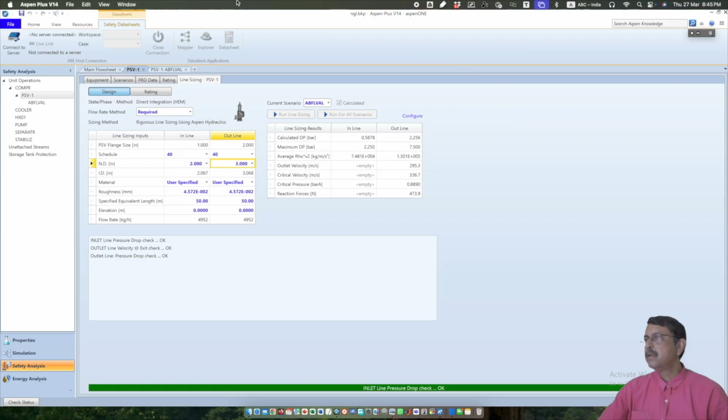Now let us go to the other one, that is the rupture disk. Okay, let us first understand what a rupture disk is. A rupture disk or a bursting disk is a non-reclosing pressure relief device. Reclosing means it again closes, so it opens and closes. Pressure safety valve works in that fashion. So whenever it is required, it opens, and whenever its job is done, it closes.

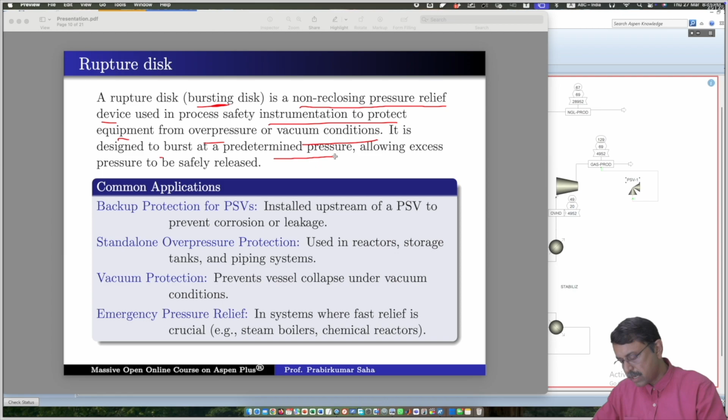But in this case, it ruptures, it bursts. Okay, so it is sort of a one-time use device. So it is a non-reclosing pressure relief device, which is used in process safety instrumentation to protect equipment from overpressure or vacuum condition. It is designed to burst at a predetermined pressure, allowing excess pressure to be safely released.

So the job of the pressure safety valve and the rupture disk, they are the same. And in addition to the overpressure, the rupture disk also caters to the vacuum condition, which the pressure safety valve doesn't do, but the rupture disk does. There are certain common applications. Obviously, the household application I have already discussed, how it is done in a pressure cooker, but industrially, this is a common backup protection for a PSV. Even in the case of the pressure cooker, this rupture disk is a backup protection or the extra layer of protection.

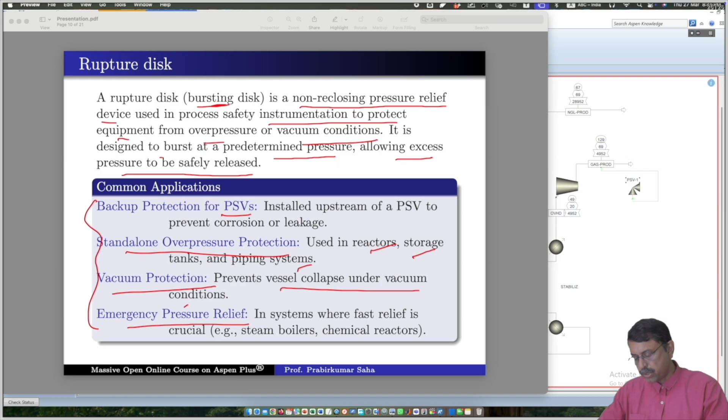Okay. It can be a standalone overpressure protection also. I mean, there might be a case where there is no pressure safety valve and there is only a rupture disk. For instance, a reactor or storage tank or piping system, or more commonly in a vacuum tank. There we probably cannot use the pressure safety valve, so we have to use a rupture disk. That's what is written over here, vacuum protection. It prevents vessel collapse under vacuum condition, and emergency pressure relief, where fast relief is crucial, like steam boilers, chemical reactors. These are the characteristics of a rupture disk.

It is non-reclosing. Just now we have discussed what it is. It should have fast response. Obviously, the pressure safety valve also should be of fast nature, but the rupture disk is faster. And its reliability should be very high because it is the backup for the pressure safety valve. So even if there is a pressure safety valve and in an unfortunate event it fails, then the rupture disk should remain reliable enough to burst and maintain the safety of the whole process. So the rupture disk should not fail at all. So there should be high reliability on that.

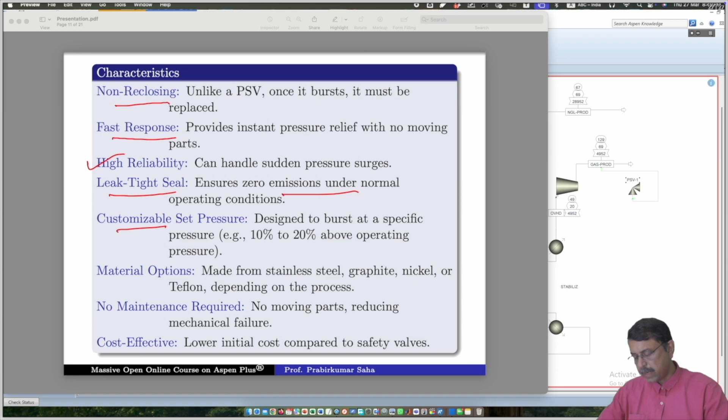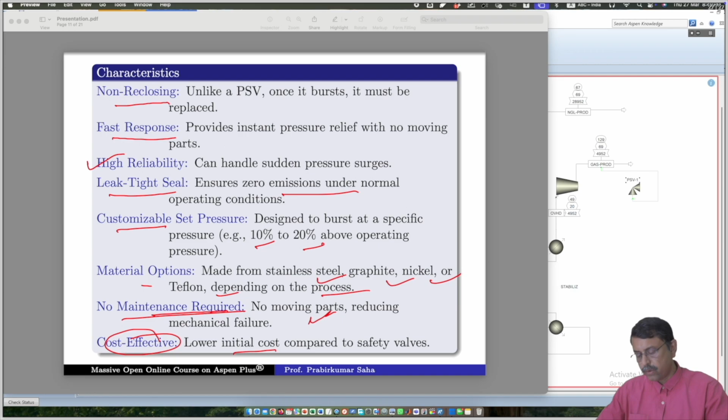And it has a leak-tight seal, so it ensures zero emission under normal operating condition. The set pressure should be customizable. It can be 10%, 20% of operating condition or whatever it may be. There are various options for material selection like stainless steel, graphite, nickel, Teflon, depending upon the process. And no maintenance is required because it doesn't have any moving part. So the mechanical failure chance is reduced quite a lot. Okay. So it is a fit and forget kind of thing. Obviously, it is cost effective because the initial cost is low.

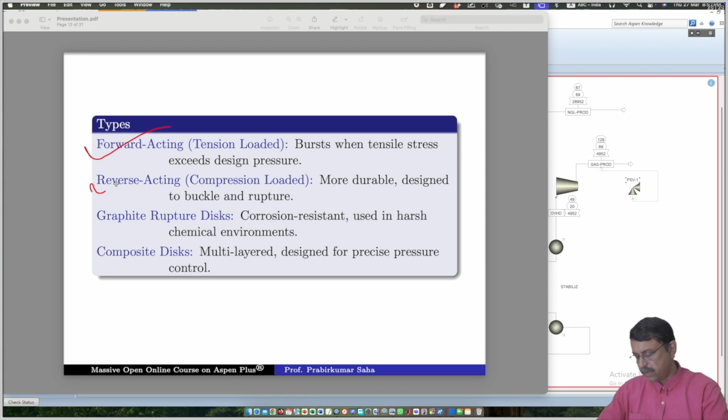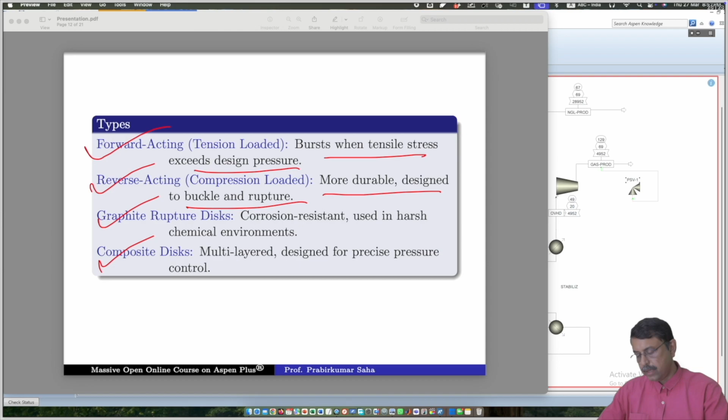Then there are various types of rupture disk. They may be forward acting, reverse acting, graphite rupture disk, composite rupture disk. Okay, each and every type has their own characteristics and they are usable for particular situations. They are listed over here.

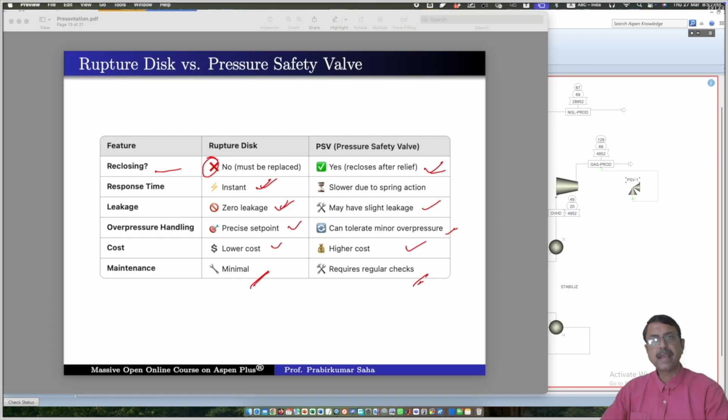Now, let us take a rupture disk and connect it to the other pressurized flow, that is NGL prod. This is a liquid flow. Okay, so let us connect over here just like before. Yeah, so this rupture disk is getting connected with NGL. So let us open this. Just like before, we have got the set of operating temperature and operating pressure, design temperature, design pressure.

Now we have to set the design temperature and pressure. So let us take it as a reference value only. Okay, in this example, let us take the reference value. Although it is not justifiable, we have to take slightly higher than the operating case, but let us take this one and see how it goes. Then we have to choose a scenario. First, we have to create a scenario. And this scenario, let us open it.

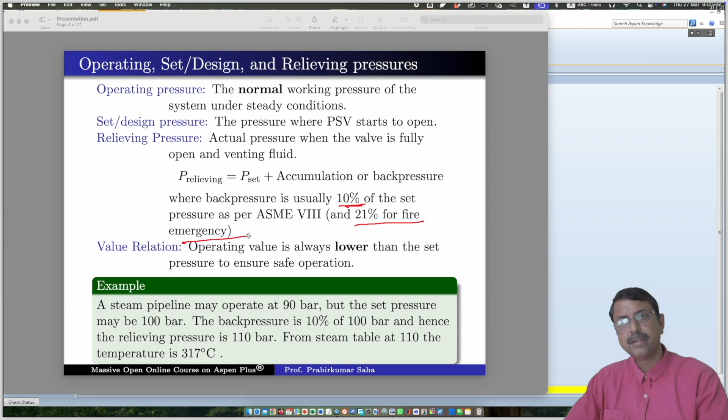We are getting 82.20. Why? Because remember, we learned over here, the back pressure is usually 10%, but it is 21% for a fire emergency. We have taken the fire emergency, right? So it is 67.93 multiplied by 1.21, 21%. That is 82.1953. Okay, that's exactly what we are getting over here. So remember, it is a fire situation.

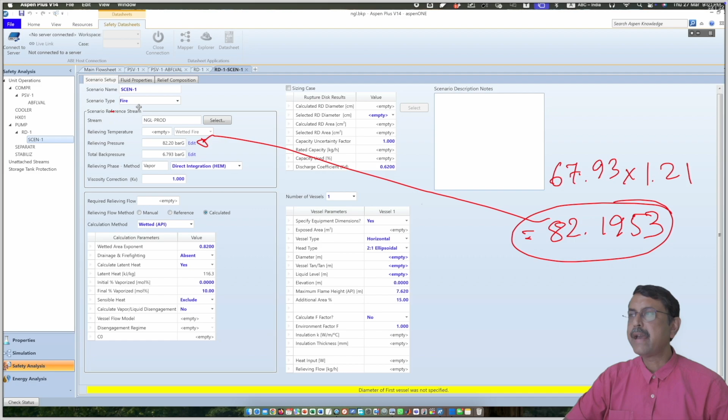Anyway, let us take the relieving flow not as calculated. We take the reference one, and the reference one is 28,952 kg per hour. So it is 2.8952 into 10 to the 4 kg per hour. That is the required relieving flow. And the relieving temperature we have to provide. So let us take the reference temperature only.

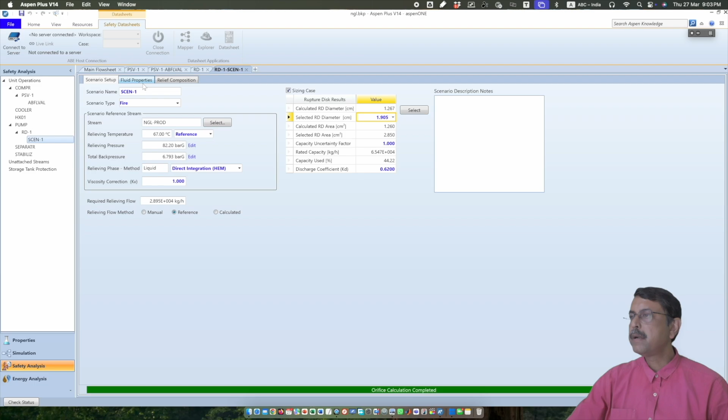And the orifice calculation is complete, but we have to do the sizing. So let us take 1.90. Go to fluid properties. Relief composition. In the relief composition, you will find almost nothing for methane, ethane, propane. But from butane onwards, you will find some components. Especially butane, PC200, PC300. These three are quite high.

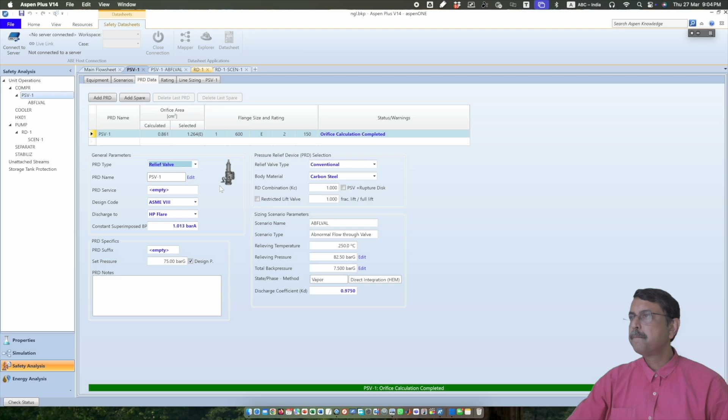Now go to PRD data. So in the PRD data, it is a rupture disk. It is not a relief valve, right? It is a rupture disk only. So it shows like this. PSV, you remember? This is the relief valve, PSV. Whereas the RD, rupture disk, looks like this. And for the discharge, we can use the high pressure flare.

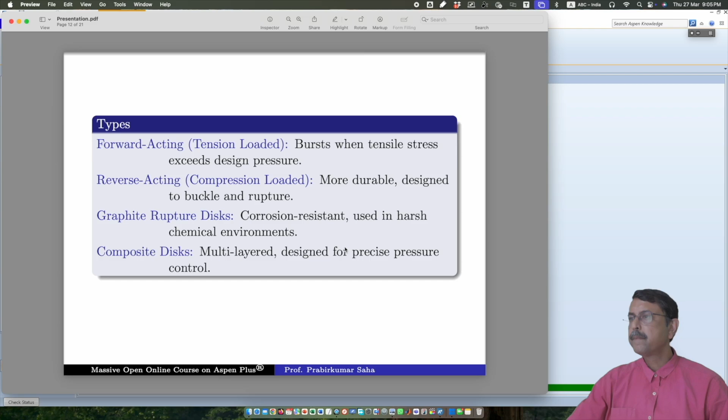And these are the rupture disk types: forward acting, reverse acting, graphite, composite. We just saw that, right? So based on the type of rupture disk required for your case, you can choose from here. The disk material you can choose from aluminium, nickel, stainless steel. Then go to rating. Here you can see the overpressure. Allowable overpressure is 21%. So 67.93 multiplied by 1.21 will give you 82.2.

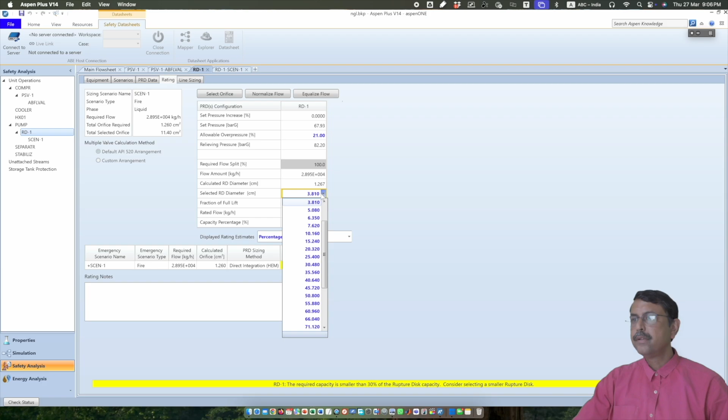Now with the selected RD diameter 1.90, you are using 44.22% of the orifice area. So that is the reason you are getting the green stripe. If you use a smaller one, then it is above 95%, so it is not correct. And if you take a higher one, then it is taking less than 30%, so it is not correct. So we chose this one. Let us keep it there.

Finally, line sizing. The rated flow is very high. So we will do it for the required flow, which is this one. We will choose schedule 40, this also 40. ND we will take, say, 2, and this one also 2. Here we have to click run sizing, but according to the API section, the inlet pipe to the rupture disk using discharge coefficient must be less than 8 times the pipe diameter in length. Now for the inlet pipeline we have taken 50 meters, but 8 pipe diameters is 0.41 meter. So this needs to be less than 0.41 meter.

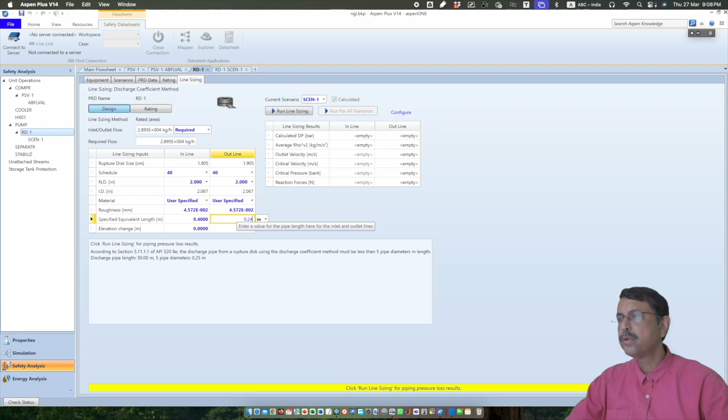Similarly, the outlet pipe must be less than 5 pipe diameters in length. The discharge pipe length we have given as 50, but it should be less than 0.25. So let us take this one 0.4 and this one 0.24 and try. Okay, so those two warnings are gone. Now click line sizing. Let us check the line sizing. Yeah, the pressure drop check is okay. So we are done with the rupture disc.

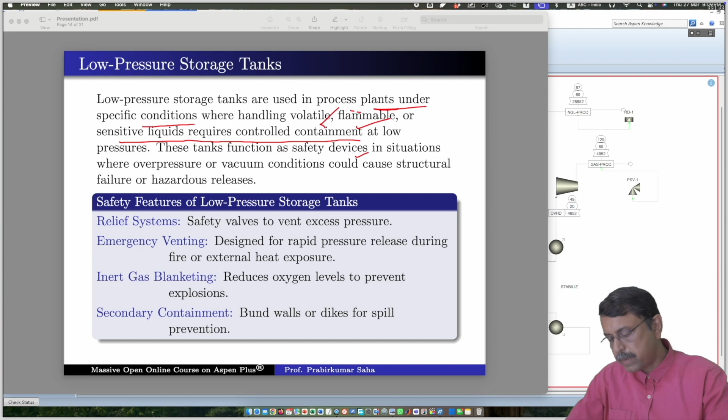Now the last one is storage tank protection. Low pressure storage tanks are used in the process plant under specific conditions where handling volatile, inflammable or sensitive liquids requires controlled containment at low pressure. So these tanks function as safety devices in situations where overpressure or vacuum conditions could cause structural failure or hazardous release.

Unlike the pressure safety valve and rupture disc, we are not letting it go out in the atmosphere or in the flare. Rather, we are trying to store the liquid or fluid in a tank, which is essentially a low pressure tank. It will also have its own pressure release valve and rupture disc as well. So these are the safety features of low pressure tanks.

It needs to have a safety valve to vent the excess pressure, and emergency venting and pressure release during fire and external heat exposure. So whatever we have discussed for pressure safety valve and rupture disc, the same thing will come over here. And it also has to have inert gas blanketing and secondary containment. So that is also needed.

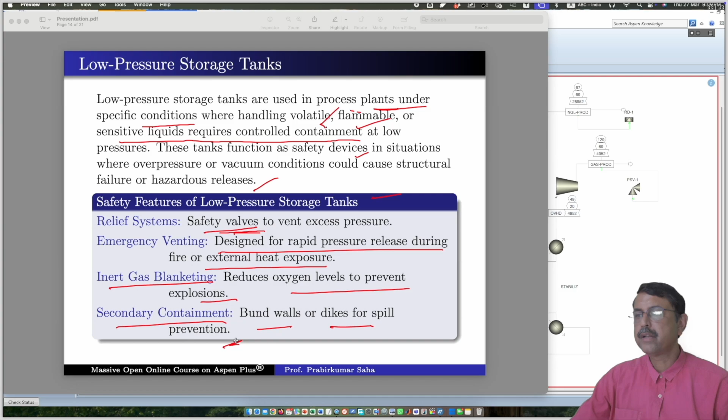Inert gas blanketing will reduce the oxygen level to prevent explosion, and secondary containment will have some bund walls or dikes for spill prevention. So these are kind of safety features for low pressure storage tanks. So these are certain conditions that require low pressure storage tanks.

Storing volatile liquids at low pressure, used for liquids with high vapor pressure such as LPG, ammonia, hydrocarbon, etc. Then protection against overpressure or vacuum collapse, equipped with pressure or vacuum relief valves to maintain tank integrity and prevent implosion during rapid emptying and cooling. Handling large volumes of low pressure gases or liquids, suitable for atmospheric and slightly pressurized storage of substances like crude oil, ethanol or LNG.

Minimizing evaporative losses, like it is used in refineries and chemical plants to store petroleum products while reducing emissions. And for preventing boiling liquid expanding vapor explosion, designed to contain vapor safely and avoid sudden rupture in case of fire exposure. So these are certain conditions that require low pressure storage tanks.

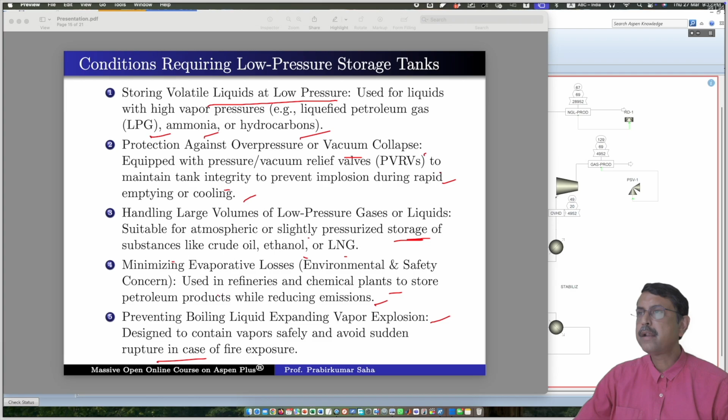Although it is said over here, in Aspen Plus we do not give such details. We just have to select the stream, and in the stream all those detailed information will be there, because the stream says that it contains methane or ethane. So what will be the density and specific gravity of that mixture of so much ethane or methane or all other pseudo components in that proportion? What is the density of that mixture? What is the specific gravity? The vapor pressure, boiling point of that mixture. All those things will be taken from the Aspen Plus property database.

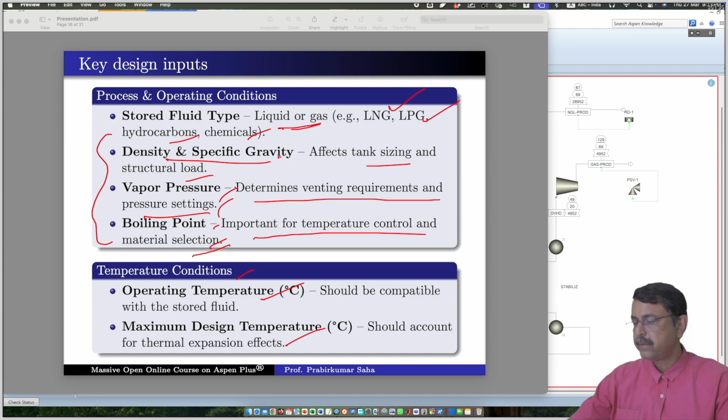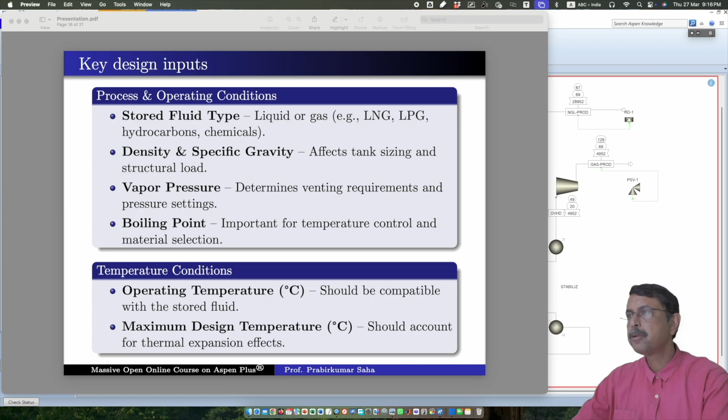Then the temperature condition, the operating temperature and maximum design temperature need to be specified. Again, if we select the stream, the operating temperature will be taken from there. Then the pressure and vacuum design parameters: we have to specify the design pressure, which should typically be 10 to 25% above the maximum operating pressure. The operating pressure is the expected pressure range under normal conditions. Vacuum design pressure prevents tank collapse due to rapid emptying and/or condensation.

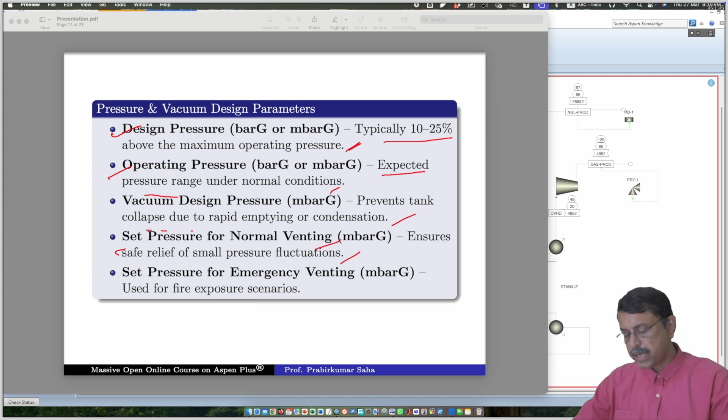The set pressure for normal venting ensures safe relief of small pressure fluctuations, and the set pressure for emergency venting is used for the fire exposure scenario. Then we have to mention the tank geometry and structural inputs, that is tank type, whether horizontal, vertical or spherical. Tank diameter and height determine the storage volume. Then material of construction like carbon steel, stainless steel or special alloy. The corrosion allowance, required if dealing with corrosive fluid, and bottom tank height above grade, typically 0.5 to 1.5 meter for drainage and maintenance purposes.

Then we have to provide the information on venting and relief system design. The relief valve sizing, as per API 2000, to ensure adequate venting capacity. So normal venting capacity, emergency venting capacity, breather valve design, inert gas blanketing.

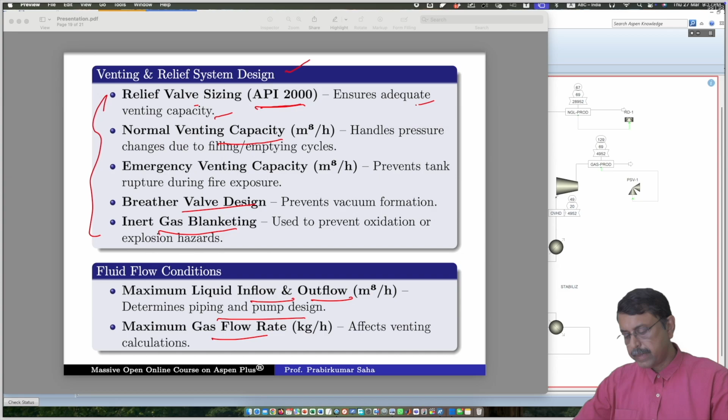So all those things we have to specify. The fluid flow condition, the maximum liquid inflow and outflow, that determines the piping and pump design. Maximum gas flow rate affects the venting calculation. The last but not the least, we have to check the safety and regulatory compliance. These are the applicable design standards like API 650, API 620, API 2000, ASME Section 8.

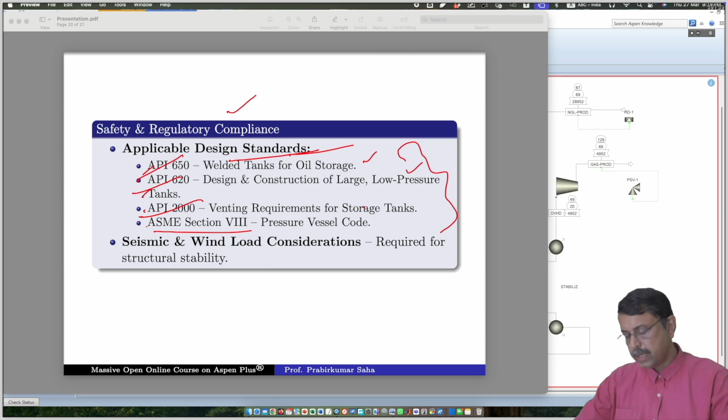So whatever you want to choose, you have to. But for various kinds of application, the standards will differ, so you have to choose appropriately. And the seismic and wind load considerations are required for structural stability. So these are the things that you have to check.

Now let us call a storage tank protection. Okay. So here add one. Now you have to enter the design pressure. Okay. So this is the tank one. Now you have to select the stream first. Now this stream, you can leave it empty or you can select an Aspen Plus stream. Now if you leave it empty, then there is much other information that you have to feed in.

But if you just select a stream, I mean if you dedicate this storage tank protection to a certain stream, then you need not provide that information. I will show you how. For the time being, let us keep the stream empty. Okay. Now for the time being, we give a design pressure. Let us say 0.3 design pressure we provide.

Then we have to mention operating pressure. Say vacuum design pressure. Vacuum, so it should be negative because it is in gauge, right? Gauge pressure, so it should be negative. Then operating pressure, let us keep 0.06 bar. Then diameter and height of the tank. Let us take a huge tank of say 10 meter diameter and 10 meter height.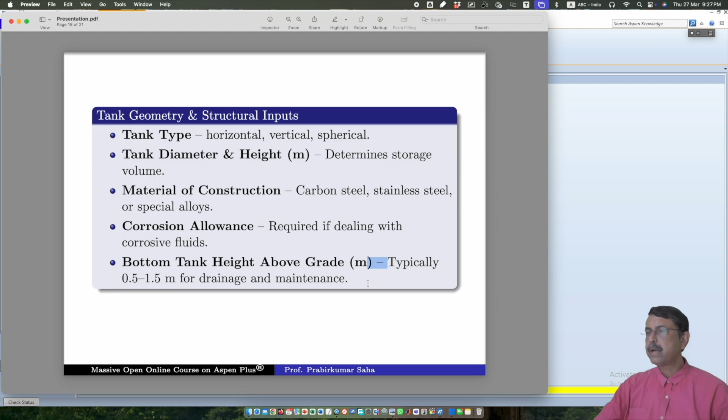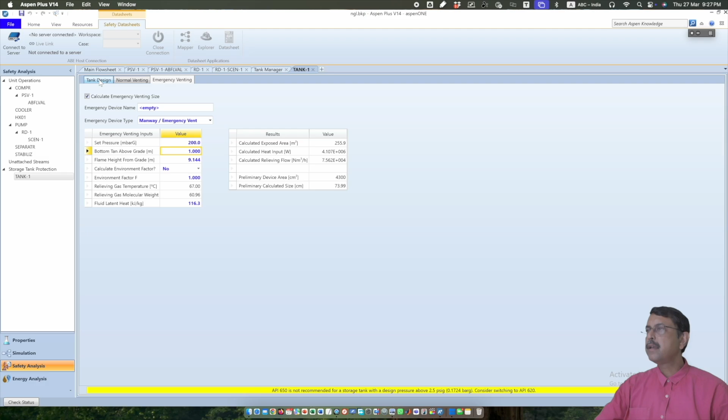Then bottom above grade, M, we have some design value for that. It is typically 0.5 to 1.5 for drainage and maintenance. So let us keep 1 meter, okay? So it is 1 meter, and one constraint it is informing us of: API 650 is not recommended for a storage tank with design pressure above 2.5 psig. Consider switching to API 620. So they are asking us to change it to API 620. So that's what we take and we get OK.

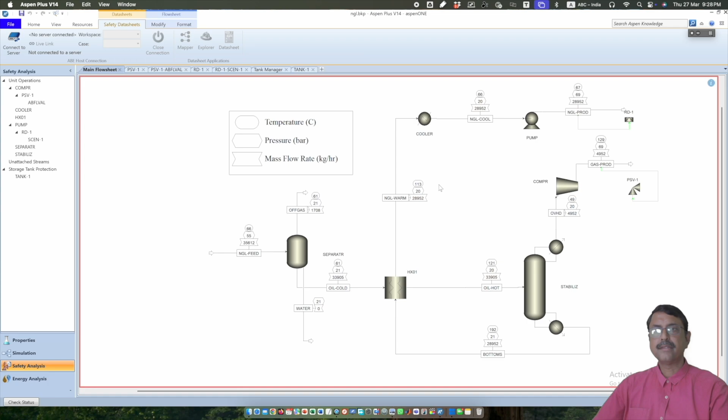So that means we have designed the storage tank, we have designed the RD, rupture disk, and we have designed the pressure safety valve for this particular system, and this design is acceptable. That's what it means. Okay. So that way you can perform the safety analysis of a process after the simulation is over, and you can attach various pressure safety valves, rupture disks and storage tanks as and where required. With that, we come to the end of this lecture.